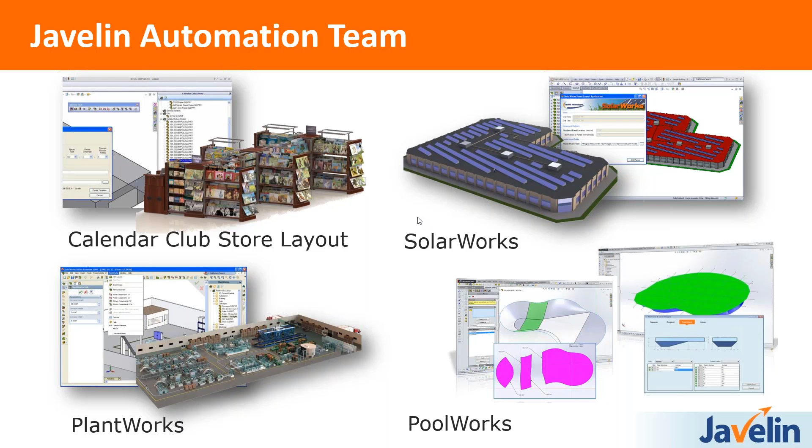Javelin has been selling DriveWorks since 2004, and we have a dedicated team focused on DriveWorks and automation, and Lee is one of our application experts. We've got two other fellows who provide DriveWorks services, training, and support, but we also have capabilities to custom program other applications. Here are four applications we've written based on programming rather than DriveWorks, that automate tasks associated with plant layout, developing pool liners, solar panel layouts, rooftop layouts, as well as planograms for store layouts. So we've got expertise both in DriveWorks and in automation projects, so we've got you covered from all angles.

So last year I started asking people, do you CPQ? And a lot of people told me, what the heck is CPQ? So CPQ is another acronym that we hear fairly commonly. It refers to configure, price, quote.

It's the ability to configure a product based on rules so that you can customize for size, accessories, options, and other features of a product, and integrate with corporate or enterprise systems like ERP and costing systems, so that you can quickly establish the price to manufacture the product, and then quickly generate a quote for that product. CPQ is typically referred to systems not unlike ordering a t-shirt online, or ordering a pizza online, or even buying a car. So the ability to quickly design a variant or create a new variant based on rules, and having the ability to generate the quote within a short amount of time.

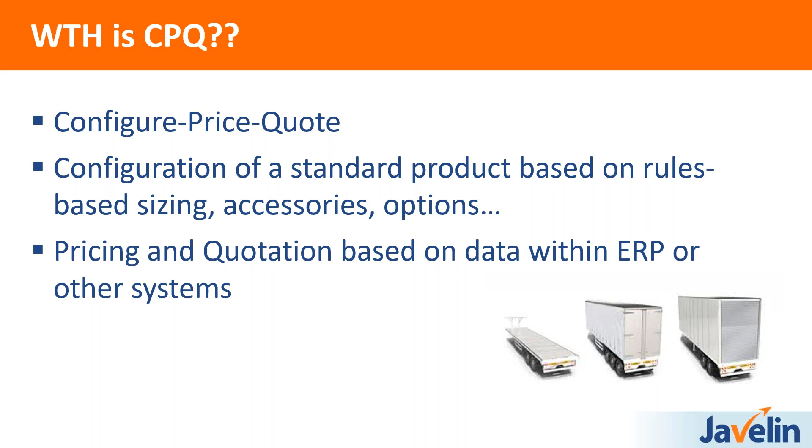Now, one of the things about CPQ, I'm just going to show this for a second. One of the things about CPQ is that it's all meant to be done within a short amount of time, but the one dimension that DriveWorks adds is the ability to generate other documents. So it doesn't stop at the quoting process, it extends a significant way further. So a lot of times I refer to it as CQP, so configure, quote the customer, and then produce all the products based on drawings and other documentation that you create.

So you'll see that in a second, when we start showing some of the presentations.

Now, who needs CPQ? Who needs a package like DriveWorks? If your company is unable to meet quote deadlines... I sold my first license of DriveWorks in 2007, and we've had this team focused on DriveWorks and DriveWorks alone since 2015, so we've been at it almost 3 years. One thing I've learned talking about DriveWorks and talking to customers about configurators and quoting is that the speed of the quote as well as the accuracy is super important. So fast quotes, very important, I hear that all the time.

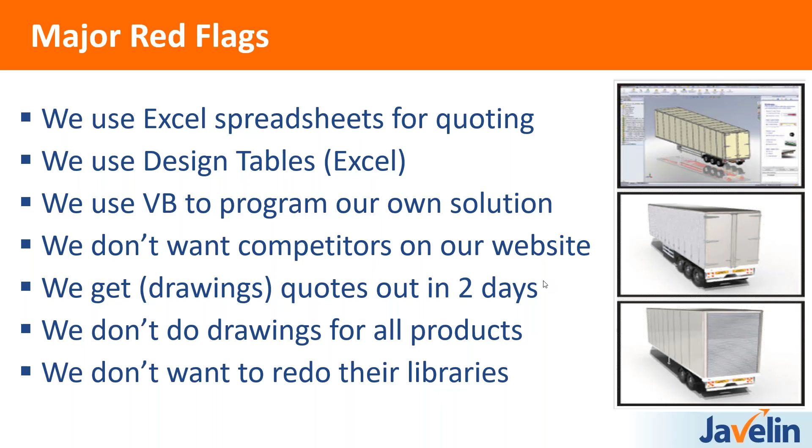So yeah, these are some of the things that, if they are representative of comments that reflect an aspect of your business, then it's probably a good idea that we talk. And I think you're in the right place and are going to see some amazing things.

Real quick customer stories. My first customer is Thordon Bearings. They sell bearing assemblies for large ships, very green, very environmentally friendly. Ships can be found all over the world, and they needed a system that allowed them to support their inside salespeople and their dealers all across the world.

It was quite common that someone had to go out to one of these sites where the boat was located, take measurements, come back. So you got a lot of travel that can be involved, or other projects got in the way. But with this system, people are able to go online, enter the values of each of the parameters for that particular requirement, and they've been able to reduce days of work down to about 6 to 11 minutes.

They produce all their documents all at once, whether it's quotes or drawings or models or NC programming for machining of their parts. We built the system for them, and we integrate DriveWorks with their enterprise systems for CRM, ERP, PDM, and manufacturing. One nice thing about DriveWorks is it's very capable of being connected to other systems, which is very important. In this case, we're connected to a lot of different aspects of their business, automating a lot of tasks.

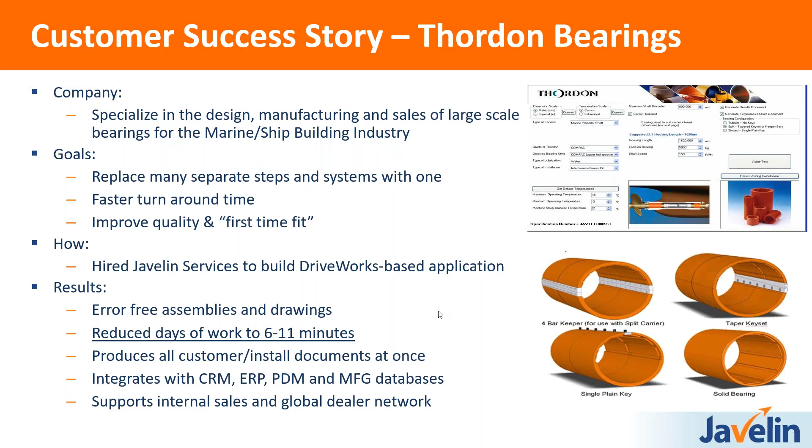One other customer success story I'd like to share is Blue Giant. They've had DriveWorks probably for about 8 or 9 years, and this will give you an idea of some of the dock seals and dock levelers, that equipment that they make. They've got a full-time staff of people that are doing DriveWorks for all of their products.

About 80% of all their projects run through DriveWorks, and of the 20% that do not get completed in DriveWorks, they're started in DriveWorks and then finished off manually for whatever customization is needed. They told us that they were able to reduce the time and effort to create both drawings and quotes by about 90%, and 100% of the drawing errors that they find are as a result of the manual tasks as opposed to what comes out of DriveWorks, as that is all 100% correct. So great customer of ours, and they are thriving with their business with the use of DriveWorks.

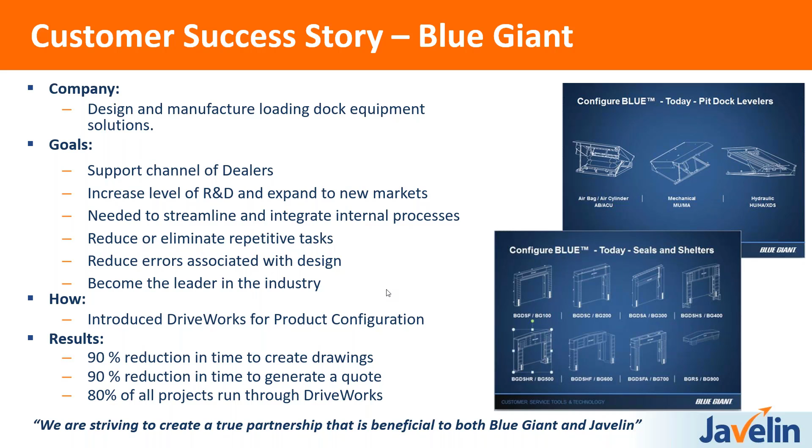So those are two applications. This picture is actually part of a website that shows a lot of different configurators and some of the types of products that you can refer to as same as but slightly different. We'll show you a couple of these applications a little bit later on.

I know a couple of you in here are conveyor folks. I think there's a trailer manufacturer here, and someone doing furniture. So there are some applications, and we're going to show the furniture application a little later on.

Most, if not all of you, are using SolidWorks right now. So as I said before, if you have SolidWorks, you already have some DriveWorks functionality within your SolidWorks license. It's referred to as DriveWorks Express. You can activate it.

It has limited functionality. If you look at the interface here, you'll see there's a panel where you can enter some values, and you have some pull-down lists. It's very static — you can't really connect it to anything for pricing or for generating quotes. It's simply enter parameters and automate models and drawings. So it's good for what it does, and some companies have used it quite extensively.

But we like people to start their automation projects with more capability if they're really serious about it, and it's very important. We recommend the next level of DriveWorks, called DriveWorks Solo.

This version, DriveWorks Solo, also works inside SolidWorks but has much more functionality and controls, like the rules builder, which Lee's going to show in a bit. It's closer to the higher functional levels of DriveWorks, and just that aspect alone will save you the cost of Solo if you're serious about getting into the technology. So let me change over to Lee to give a quick overview of DriveWorks Solo.

Hi everybody. So DriveWorks Solo, like we mentioned, operates inside of SolidWorks. Right here on the side panel is DriveWorks Solo — it's an add-in just like some of the other panels. What it allows you to do, we're first going to run it, and then we'll look quickly at some of the features and how you build it.

The biggest thing DriveWorks Solo gives you over Express as far as looks go is much more functional forms. You're able to have drop-down lists, you can pick from tables, pull in some customer data, and get a little bit smarter about your rules. You can also build form flows which allow people to make different choices, and we have graphics here that help people get an idea of what they're picking.

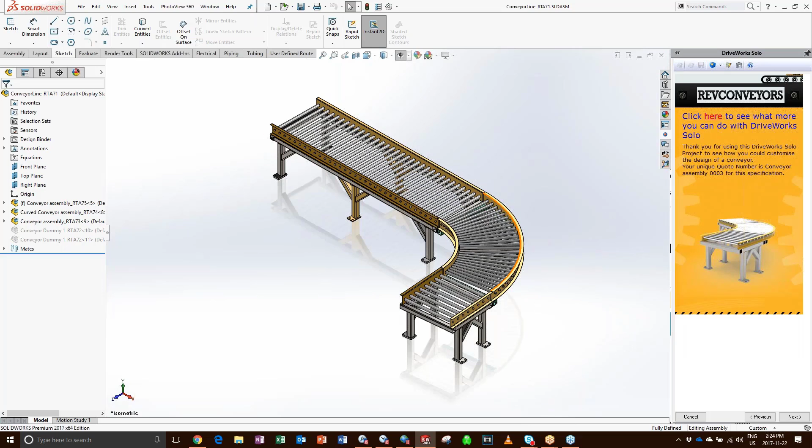If you look at the bottom right-hand side of your screen, you'll see DriveWorks actually opening up SolidWorks, entering the values that Lee just put into those fields, and popping them into SolidWorks. He referred to DriveWorks Express, but this is functionality available in Solo — the ability to put in data and start using it.

So here's my conveyor — I've got it pre-built right there, but now I can go back and, let's say I need the length of the last one to be 2,500. I can enter that in and do preview again, and it will go back and modify those pieces. It's only modifying the models that need to be changed, and in a few moments I'll have an update.

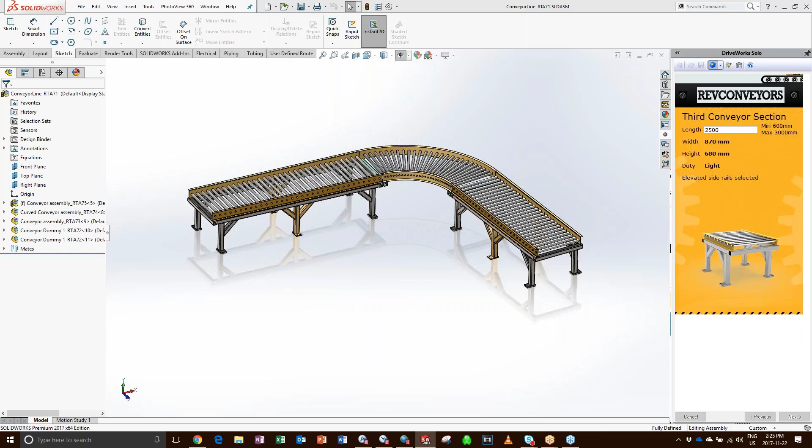So I'm able to actually see what I'm doing, tweak it, modify it, measure it, and all the tools available to me in SolidWorks are available here. So if I wanted to measure the distance between this face and this edge, I'm able to do all of that just as I would with a normal SolidWorks model.

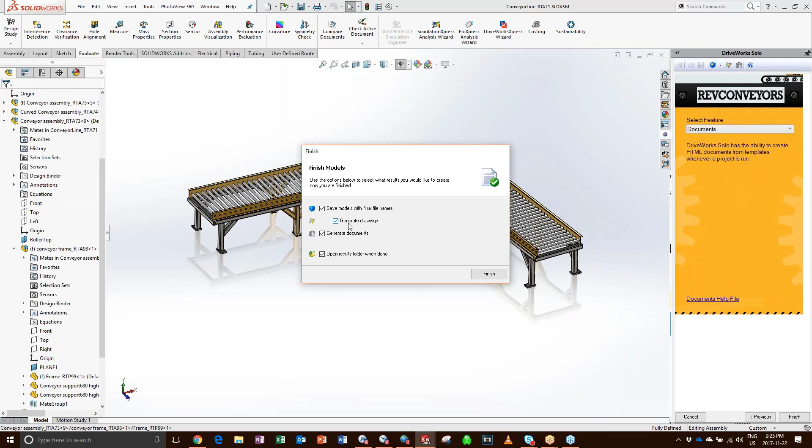Once I'm happy with it, I can then go ahead and finalize, where I'll get the drawings now — we're not just getting models, we're getting the full drawings, and we'll also get some documents for quote and BOM as well.

So we'll go ahead and finalize that. And now it's going to start the drawings here in a second, and you'll start to see the drawings whiz across the screen as they make them one by one.

So these can be really good. These are not just sales drawings. They can be your manufacturing drawings, your laser cutting drawings, your fitting drawings. Anything that you can do in a SolidWorks drawing, you can have DriveWorks produce for you as well.

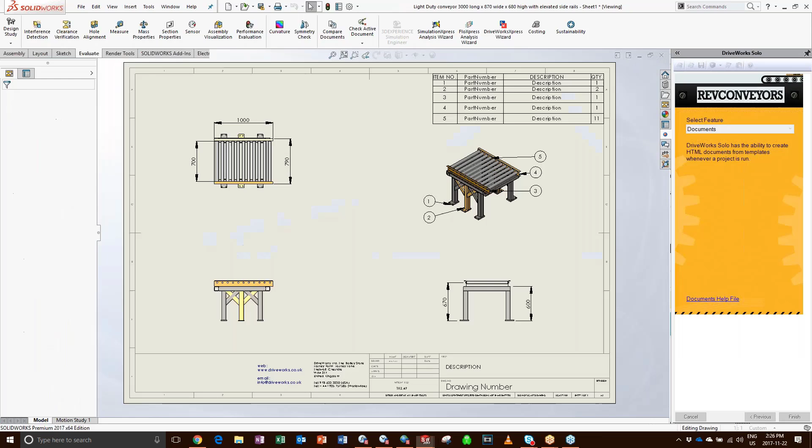So here come the drawings. And you can see it's resizing, it's inserting the new models, it's resizing the views, moving any balloons around that need to be moved, and then creating the drawing files in our new location with our names.

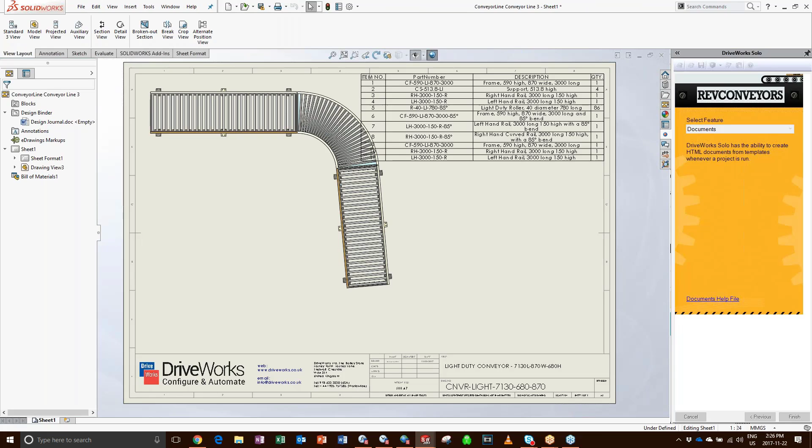And you can see the custom properties are also being filled out as well. So that metadata is going to travel through the different business systems of your company, right? Because once you do a quote and it becomes an order, it goes into PDM, and once it goes into PDM, it goes into the ERP. All of that information can now be driven straight in.

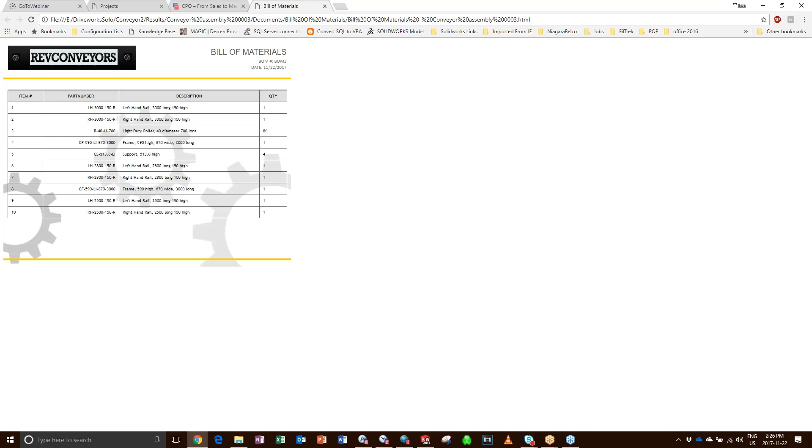You can go and check out our documents. Here's our bill of material, right? And these are customizable to your company. These are HTML documents, so they're really lightweight. That's the only format that's available in Solo, but it's enough to get the job done, right?

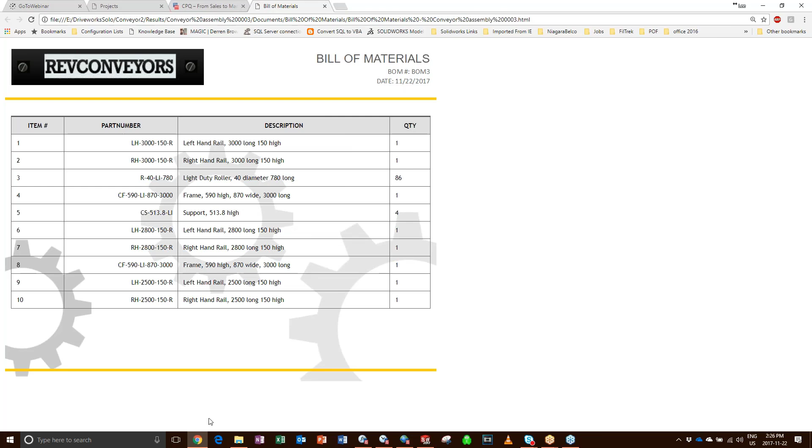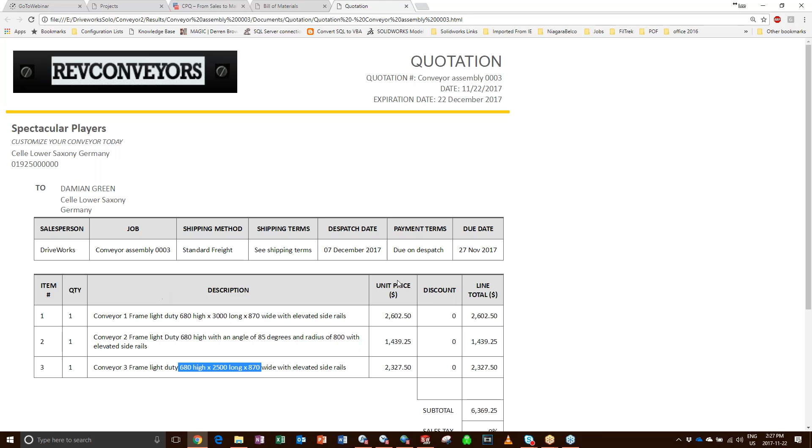We can check out a quotation. All of these rules are built based on what I configured. So you can see there's my 3000 long. There's the one I did that was 2500 millimeters long, right? So all those values get passed in based on rules.

So we've been talking a lot about rules up till now. And what do we mean by rules? This is really, I would say, the most beneficial part of Solo. This is the thing that's worth paying for. And that is having the more advanced rules.

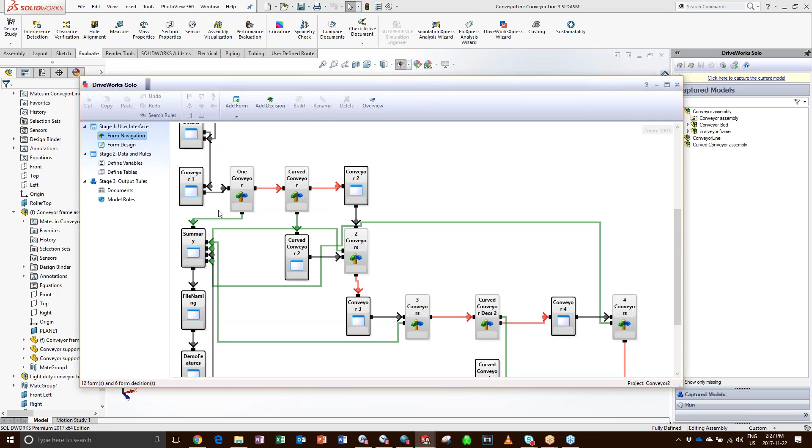Not only can I create more advanced forms and make decisions, so if I pick something, I go to one form; if I pick something else, it takes me to another, so on. I can use my rules to build more advanced forms, like we mentioned. But let's take a look at the hallmark of it, which is the rule builder.

So this is the almighty rule builder. This is the thing that puts it a light year beyond Excel. This is the thing that gives you access to not just building rules. So let's see what rules we can build.

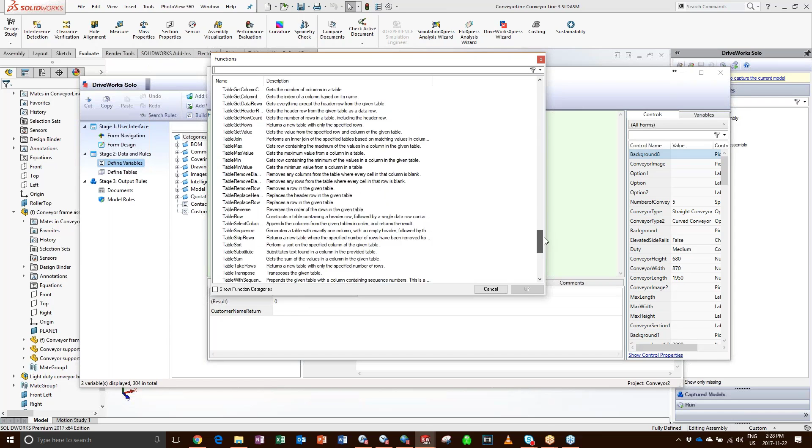We have a whole host of rules in here that we can search through. Pretty much everything that you see in Excel, plus a lot more things that DriveWorks has built custom for us, right? So if we want to look at a VLOOKUP, there's our VLOOKUP.

If we engaged it, the rule builder is actually going to walk us through the steps, and we just have to answer the questions. What are we looking up? What table are we looking in? What column do we want to get back? So on, so on, and so on.

And this isn't just for the VLOOKUPs. This is for every single rule that's in DriveWorks. You're able to have a rule builder to help guide you through it. So you really don't need to know programming to set this up. You just need to know more or less how to answer questions and probably just how to understand formulas like you would see in Excel.

Everything that you see in here is a formula that you could write in Excel for the most part. So the other nice thing too is it gives you some troubleshooting, so we get to break down the steps we're taking. We can also start to drill down through the different rules if we're having trouble. So this is great for troubleshooting your projects, right?

This is very good for troubleshooting projects. It also keeps track of the history and the comments for us in real time as well. So if we make a change and we're playing with something, we're able to go back and actually see what's happening. And if we messed up, we can bring the old one back without any problems, right?

So this is a really great tool. Solo's primary advantage, I think, is the tables. A lot of data we interact with in life is tabular in nature. So, it makes sense that we can bring these tables in, and that's a real benefit for Solo.

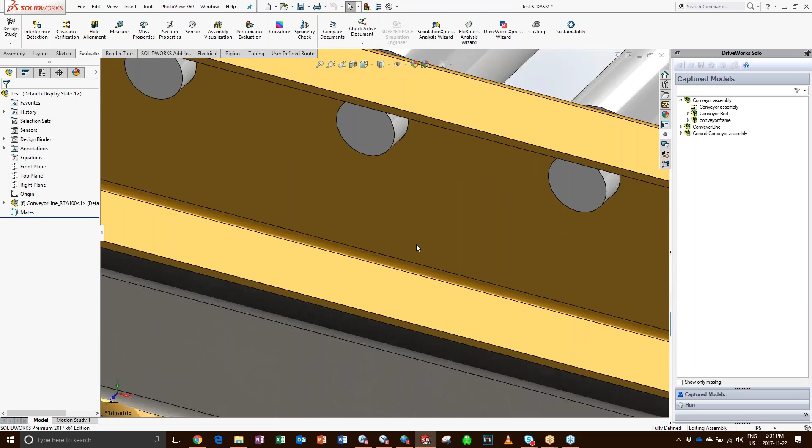So there's one of them, right? And I'm able to go in and grab the top plane here, and I can mate it, right?

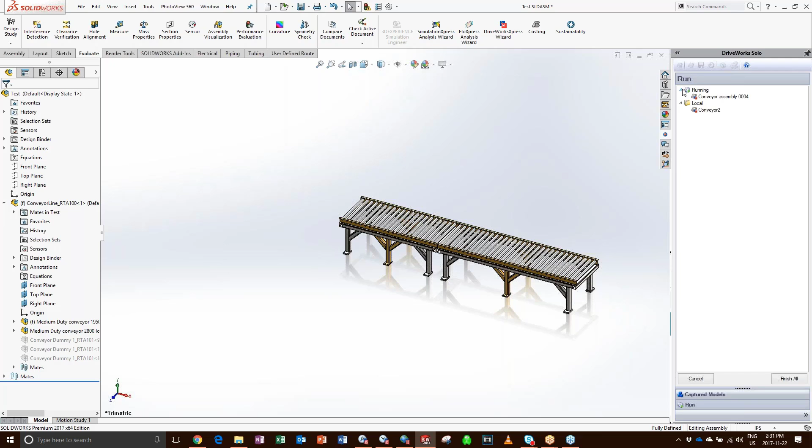Now if I wanted to bring in a second conveyor down here in my run, I can go in and run another conveyor. So maybe this time I want to do one of these bigger ones that's got a curve. I want it to be... well, let's just say I wanted to leave it like that because I don't want to change the width of the conveyor. So I'll do another conveyor.

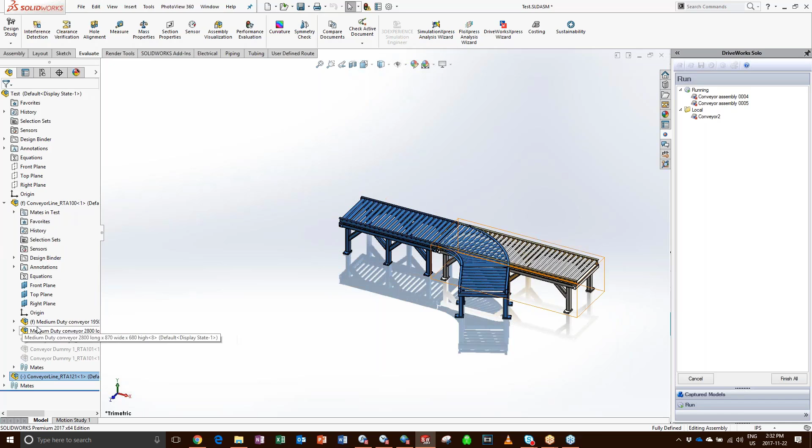And they're all live, right? That's the beautiful part about these. They're all live in here. So if I came in here and I wanted to grab this guy and bring it up and mate it to the back of this guy, just give me a moment here to find my planes.

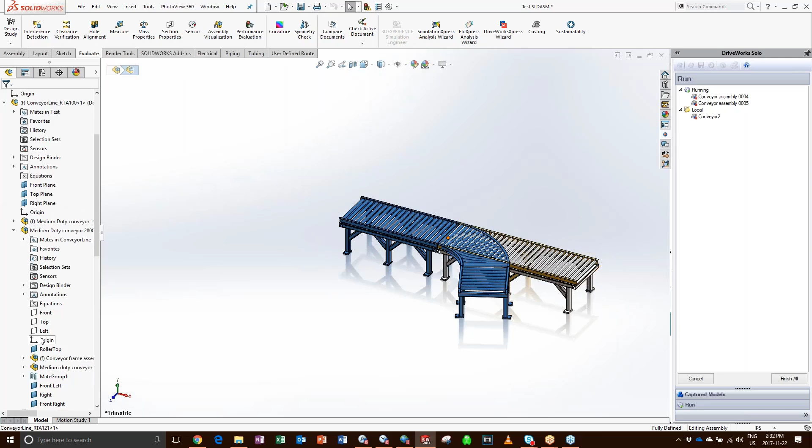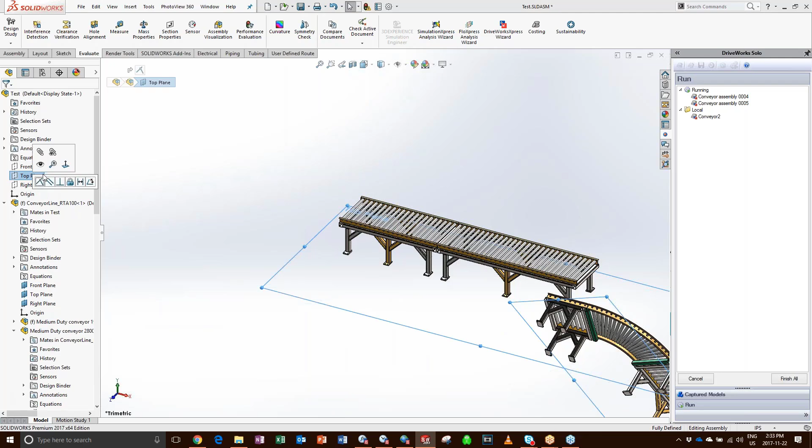Oh, actually, oops. Yep, move here. Okay, so let's take that one. Right, so I'm able to actually start to build an assembly right off of my other planes here.

Okay, now if I wanted to go back, I'll just demonstrate this really quick. If I wanted to go back into this previous conveyor and edit it, let's go back. Let's say I wanted to make this one now 3,000. You'll see that this end conveyor here, this conveyor right here in the middle is going to be updated without actually affecting anything else, which is really neat.

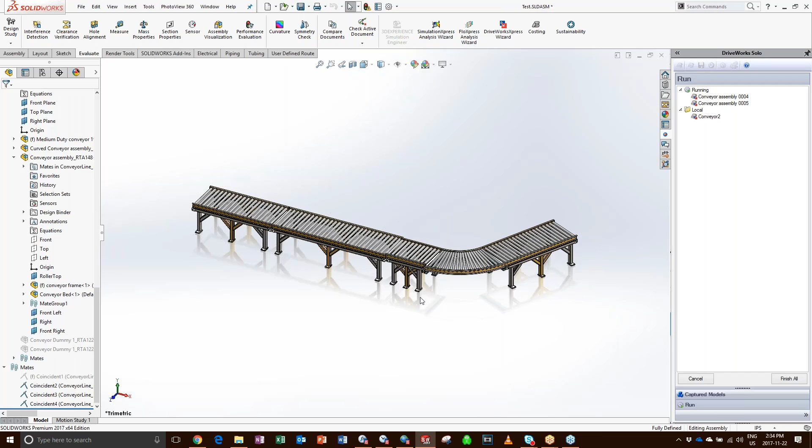So this is a really cool thing. It allows you to build a lot of smaller projects and start to utilize them together to build bigger assemblies. This is one of the ways that if you happen to have a product that you can't actually fully automate, then you can actually start to automate smaller chunks and use them together inside your assemblies in real time.

So that's a kind of a neat thing. Now I think we're ready to go on to Pro. I don't know if John, you wanted to talk about Pro first. Yeah, let me take that.

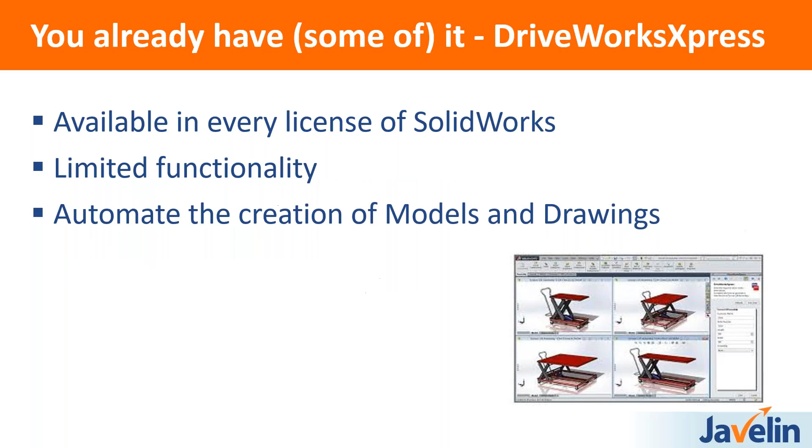Okay, so as we mentioned, DriveWorks is a scalable product. So we started with DriveWorks Express, which is basically just drawings and models. We showed DriveWorks... did I say Express? It's DriveWorks Express. DriveWorks Solo is the next level up that allows you to do components, assemblies, drawings, utilize your lists for pricing or bills of materials or pre-calculations, and the rules builder, which is worth the price of Solo if you get serious about the technology.

We also want to make sure that you knew that there was a 30-day free trial that is supported by Javelin. So if you had a specific project, a small project that you wanted to try DriveWorks out for, we'd gladly help you out, and the application is free for 30 days.

So in terms of DriveWorks Pro, which is the next level up, it gives you much more functionality, much more controls, and a higher level of automation. It also allows you to integrate far easier with enterprise systems like ERP or CRM. So whether you're using SysPro or Microsoft Nav, those types of programs, or Salesforce or NetSuite, we're able to talk to all those solutions. And while he showed DriveWorks Solo working inside of SolidWorks, with DriveWorks Pro, you can get to a point where you can expose your specification interface to non-technical staff.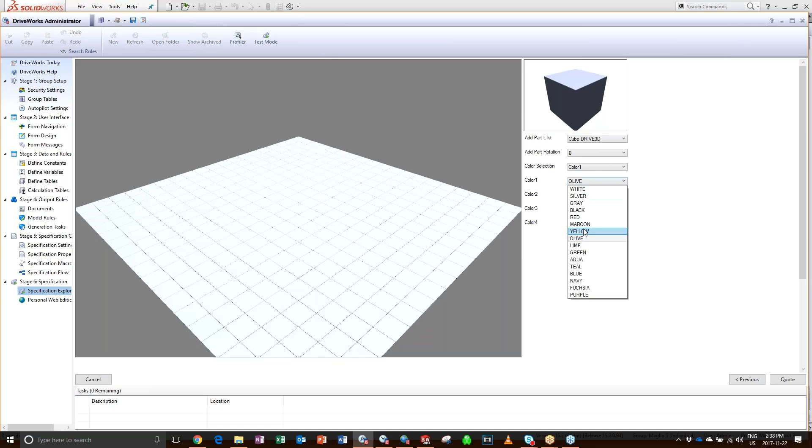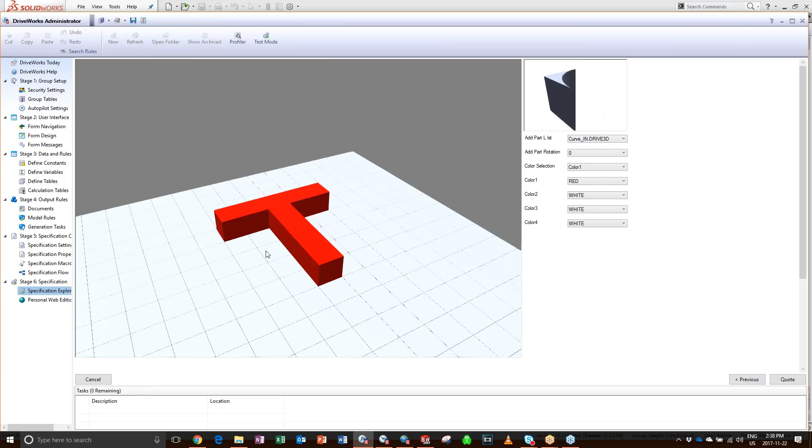This is one we built as an example. The idea is you could do a configuration off to the side and then click somewhere on the grid to place the part. So I'm going to do a cube, using the first color in my list, make it red, and place a few of them on the screen. I can zoom in and out, and go from a cube to, say, a curve, an inner curve, and as I press it, it rotates. Another function here to make this snappy is I just keep pressing on the same part and it will rotate around.

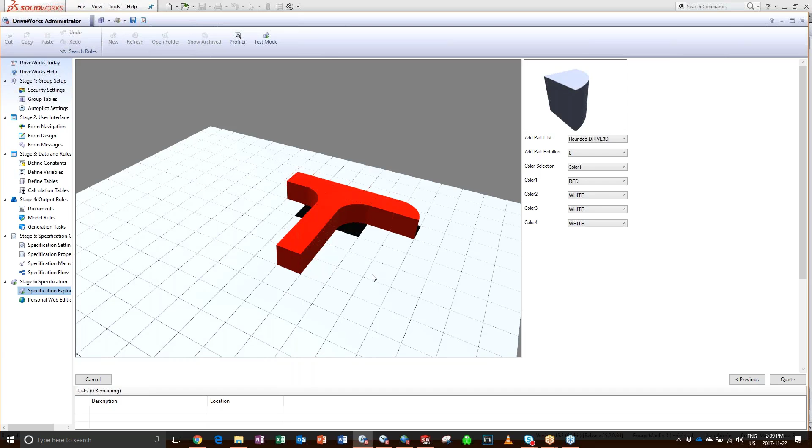This was a nice way to build neat little benches for people. We can do entire layouts outside - this was for an outdoor layout application. It's nice, fast, and pretty quick - you can do it with your fingers on a phone. So we envision this being used - right now I'm doing very simple configurations, but I could be doing much more complex ones if I wanted to.

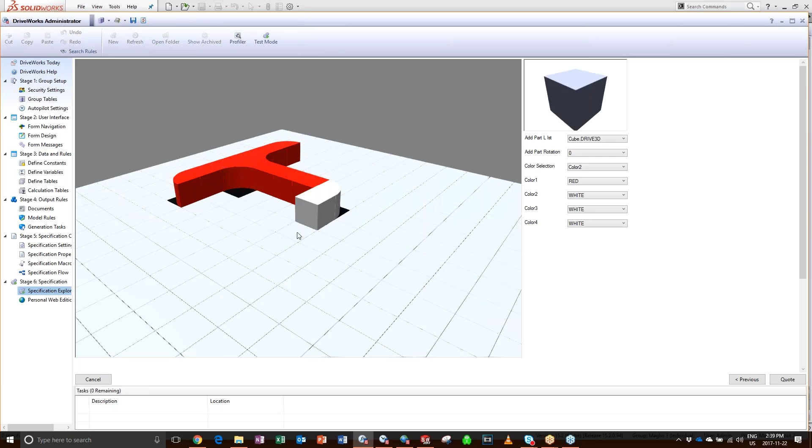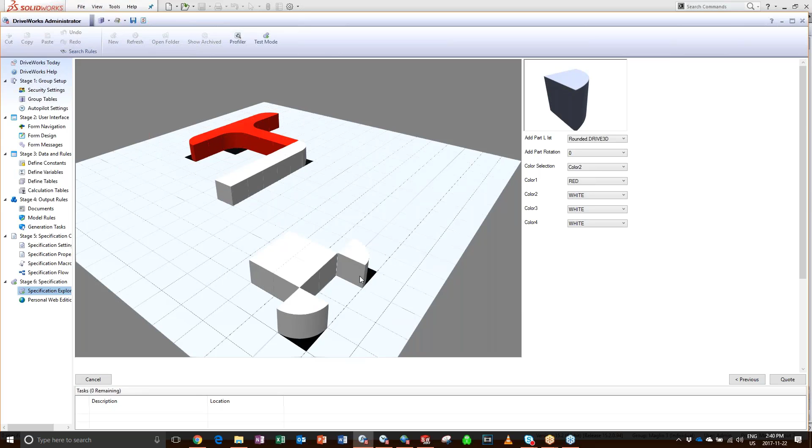We envision you could have sub-projects, or child projects, where you're configuring an entire conveyor, or cranes, buildings, all sorts of layouts. We talk to a lot of companies that do layouts of furniture, conveyors, racking - anything that follows the methodology of picking a product, configuring it, and then locating it. It's tremendous what's happening in furniture - I look at configurators all day and what I see is incredible. We've spoken with companies that do layouts of lab furniture, office furniture - any of those applications could use a system like this.

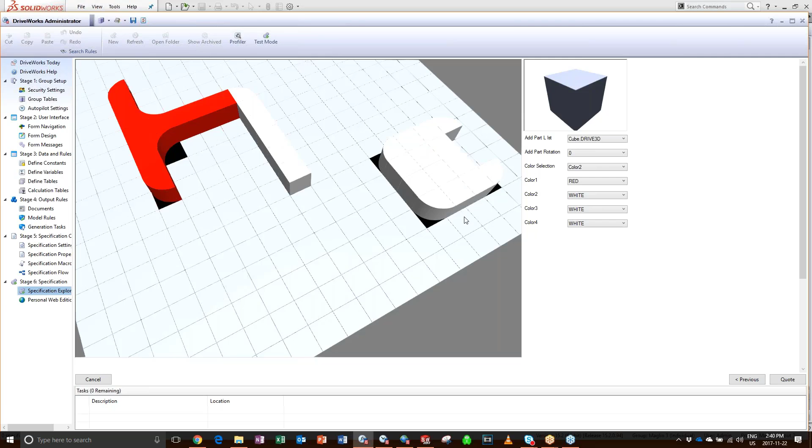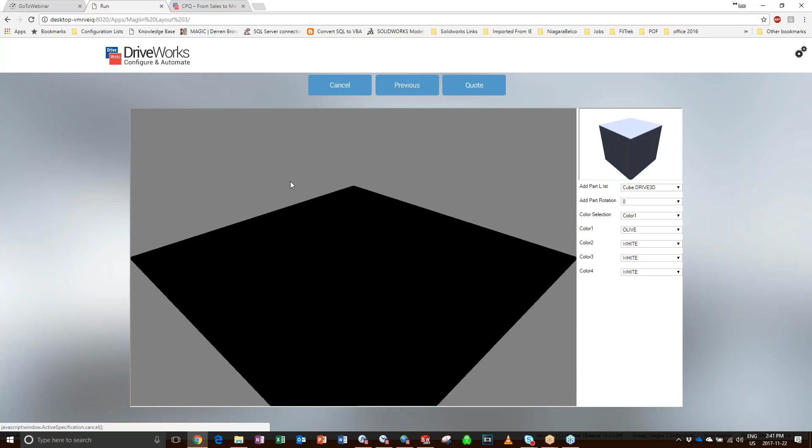Now, this can obviously be enhanced, there are other capabilities to add, but the bottom line is, although it's in DriveWorks, this could be web-facing. This could be a tool someone in inside sales could use with a customer. If you want to see it on the web, this is what it looks like. This was a demo, so we had a first page we were working on for something else, but this is the page here with the same application where we can lay out parts.

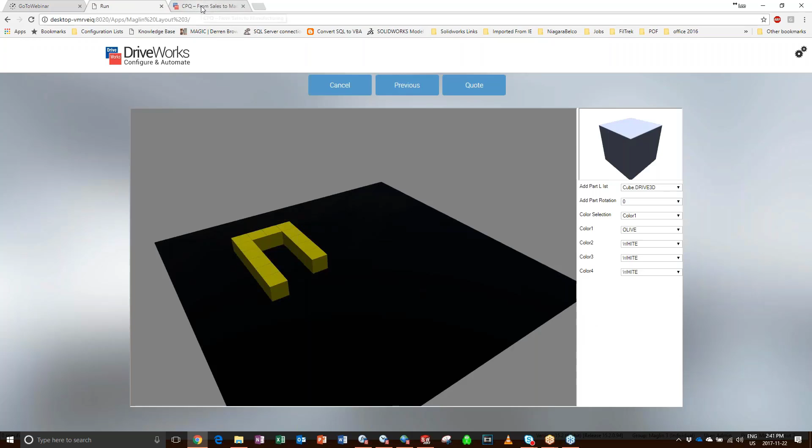Right now the graphics present a little differently - we hadn't built it for live just yet, so the floor is black by default. But you can see it's the same concept - we can spin it, rotate it, right now inside a web browser. This is the exact same technology you'll see in a second based off the website, driveworkslive.com. These are fully functional - everything you saw in Administrator and in the live personal website DriveWorks gives you can also be embedded in your real-life website. There's full flexibility in how you want to use the program.

You can use it in-house, just as Administrator, or you can use it in a private internal-facing web deployment, external web deployments, or embedded into your existing public-facing websites. It's very flexible.

Can I take that back now? Yeah, okay, great. Yep, thanks a lot, Lee. I appreciate that.

Lee is absolutely right - not every company has to go to the web or have the full graphics. These configurators, like if you've ordered a pizza online, can use images or just text to guide you through the process. Some companies just need something for engineering to get drawings out fast. It really depends on what you need to establish what level of functionality is required. As Lee mentioned, these are web-based, but they could also be set up to run right inside SolidWorks, so you've got full flexibility and control over where you want to go with this.

I'm going to click through this cupboard example because it shows a lot of different concepts of DriveWorks and CPQ - Configure Price Quote. These are publicly available websites, so take down the link or ask me for them and I'll give them to you, and you can start playing with them to see all the capabilities.

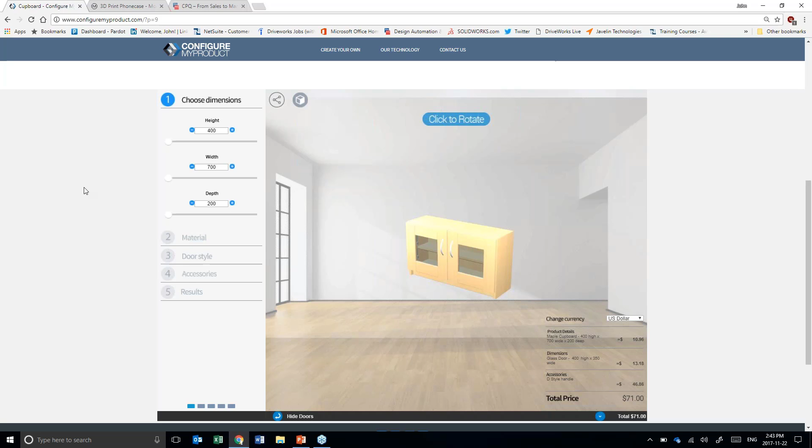I like to show this one in particular because it shows a lot of different things. You can click the rotate button and spin it around, zoom in, zoom out, or take the doors off to have a closer look. It's very graphical - as Lee mentioned, we've got furniture companies that need this because they sell a graphical product. They want to show off the way it looks and give people an idea of what they're going to get.

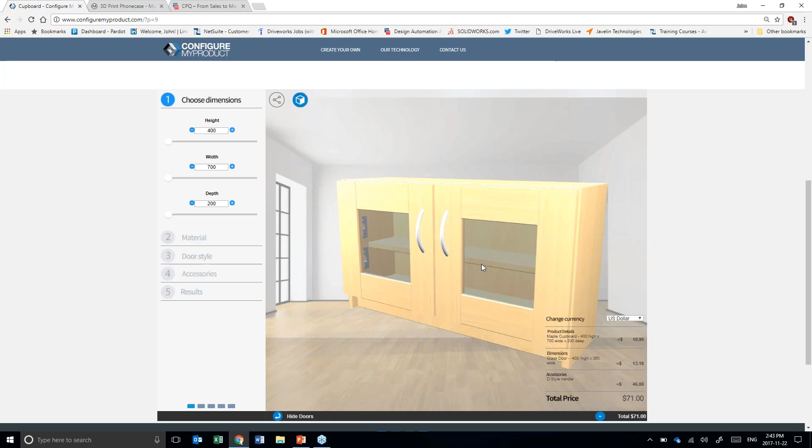The other aspect of this website is the interface is set up to show the cost. Right now, you can hit this button to eliminate the detail, or you can just have it set up so it doesn't show the cost at all. It's totally up to you.

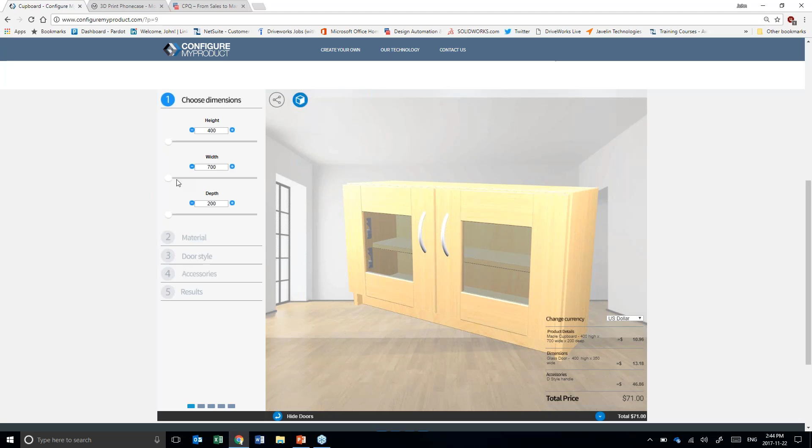There's multiple different ways you can change how this cupboard looks. With DriveWorks Pro or Solo, you can have pull-down lists - so if you had every height from 3 feet to 4 feet in 1 inch increments, you could pick from a list. Or what I like to show people is I can simply click on this button and slide it all the way to the right. Two things happen: it changes its width and it updates the price.

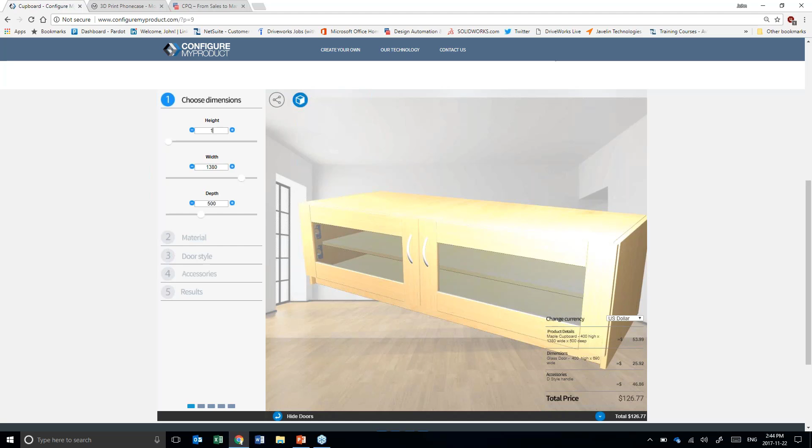Although you can pick from lists, there's a number of different ways - you can just add a value. Let's go to 500 on the depth. Very responsive, highly graphical, very visual, and it's also controlled by rules. So if I pick 10,000, it will not let me go to 10,000 - it'll stop at the default. There are other ways to handle that too: you can show the upper and lower limits, you can have flashing lights. There's a number of different ways you can manage that type of situation.

The point is you can. So if you're concerned about people specifying something that you cannot make, DriveWorks has the ability to insert rules that allows you to specify only what you can make.

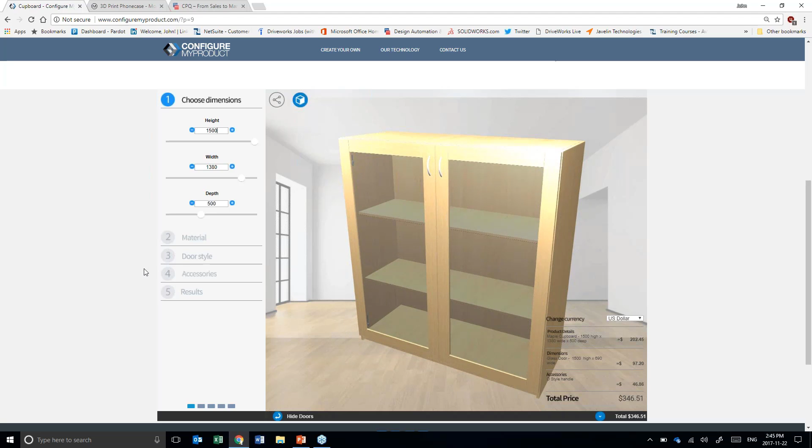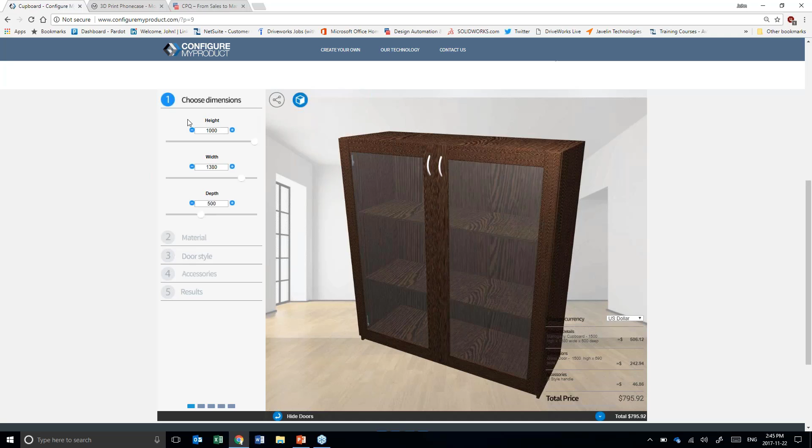I'm going to just keep making changes - if you've noticed, the price has changed. Look what happens when I click on mahogany - it goes from $346 to $795. So if you're on a budget, maybe you wanted mahogany for sure but you'll take something a little smaller - that'll cut down the price a couple hundred dollars. So you see how flexible the system is. You can keep on making changes.

Let's put a solid shaker door there. Let's change the handles to have a shaker knob. Let me go back - I like that glass one there. So you can keep changing as much as you like.

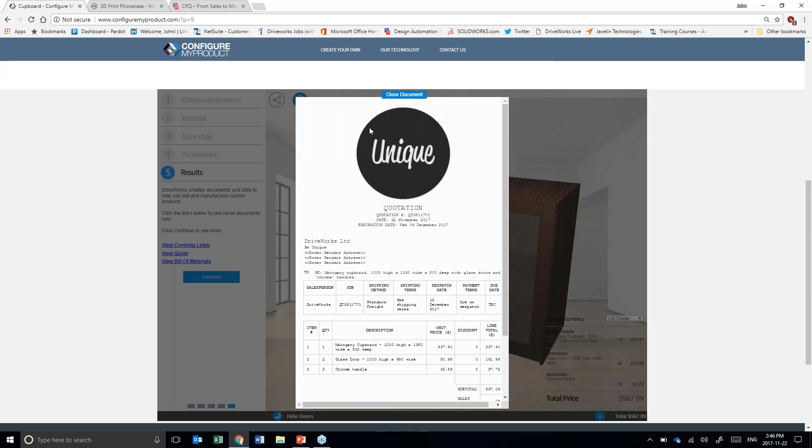One thing you'll notice if you play with this website, which I highly recommend, is that the quote has already been generated. As you've been making your selections, DriveWorks has been building the list of parts that go into the quote and the detail of the quote, and it's generated for you. So when we talk about fast quotes, I like to refer to these as instant quotes - not a lot of effort, you just click a button and they're there for you. Same with the bill of materials.

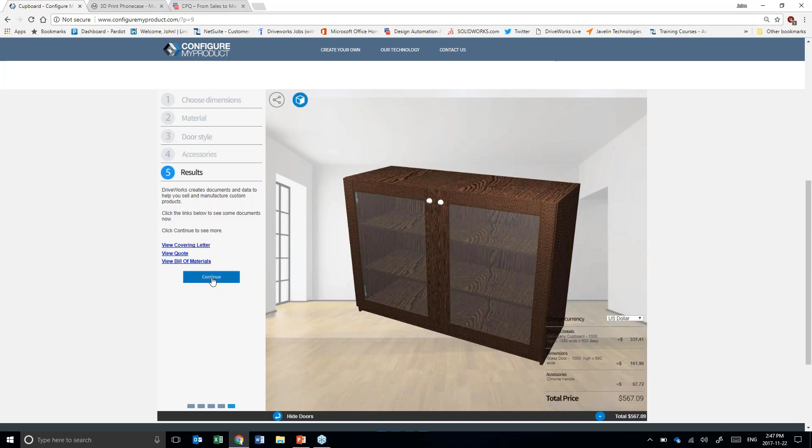Right out of SolidWorks, it takes all the components that you've put into that document and gets generated instantly and automatically. The other nice thing about this website is if you wanted to see the outputs, it's set up to generate all these documents, like parts and assembly drawings in PDF, cover letter, BOM, and quotation. We saw those already. Also DXF panels, so if you had sheet metal parts, we'd flatten them and give you the flat panels, and also the cut lists.

So let me type in his name at javelintech.com, and I'll type in Javelin here. So I'm going to hit the send button at 2:47.

Lee, if you could let us know when you get these. What's going to happen immediately is you'll see the interface changes, and all these documents will be created automatically by DriveWorks, the autopilot license with an attached license of SolidWorks. It's going to be generated by the DriveWorks server. This one in particular is located in the UK, but you can host them locally, or on Amazon if you like. As you can see, all these images have already been created and are now being presented to you.

And if he hasn't already got them, Lee will start getting the quote, the BOM. Yeah, I just got it. Okay, I just got them. Yep, took about a minute. So all these drawings are heading over to his email inbox as well.

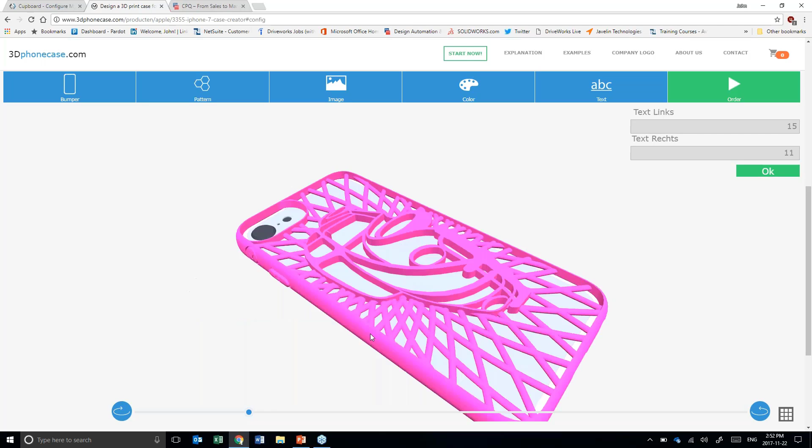It's not working the way I want. Okay, bottom line is, once you've made some changes to this... oh, there it is. So it's made the updates. You see that it just took a little while there. I could go in and change the color.

Let's make that yellow. There you go. Pretty quick, pretty responsive. Let's make another change. Let's add some text on there. Oops.

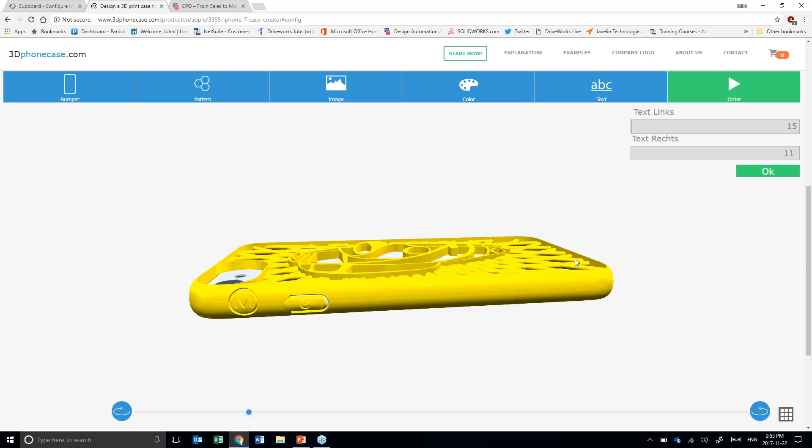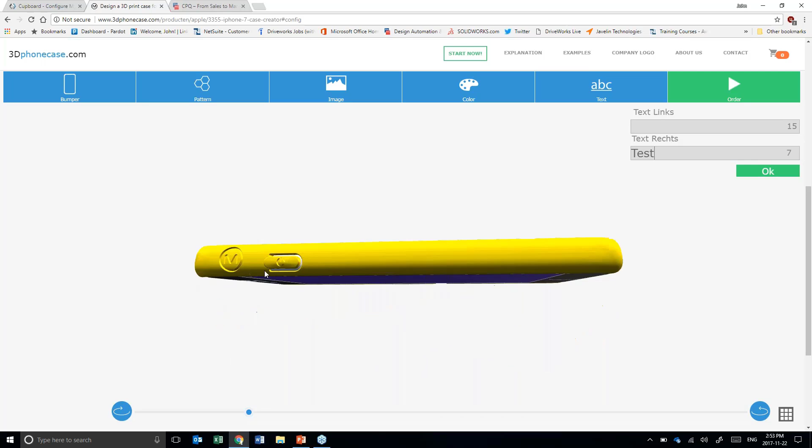Might take a little while. Hasn't come up yet. Okay, there you go. I think that other one was a little too long. So there's a

customization. Now the one thing about this, it's a live business, so I can hit this button and place an order for it. So this demonstrates how you can create a shopping cart type of situation to support e-commerce.

And the other beautiful thing is that with this company, they'll send that file that was just created, that 3D model in an STL format, to a 3D printer, print it on the 3D printer, put it in a box, and mail it to your door. So this company is in the Netherlands, but I like this website because it shows how we've merged technologies such as configurators and 3D printers.

We're looking forward to the metal printers as well, so that if someone's making small gears or those types of components, you can merge the two technologies. So pretty interesting. Here's another one that I wanted

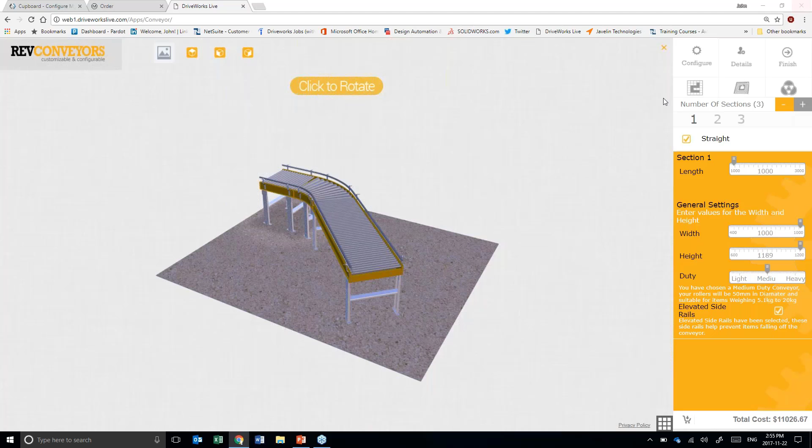to show. So you saw the conveyor example in DriveWorks Solo, and now I'm going to show it in DriveWorks Pro. We're kind of running out of time, so I'll go real fast. So here's an application where you're doing this conveyor on the internet. I can click that button to rotate, just like I did on the other site.

I can start adding sections. So let's see if I can add a section here. It'll do it live and in real time. I'll set that up as a straight section so that the angle goes away, and now I can enter a value for straight, so I have the overall length.

Let's say I want to change some of the accessories, and let's say I want to take the side rails off. Now, this site as well shows the cost, so if you can see the cost down here, if I take these side rails off by clicking that button, it drops the price from $15,782 to $15,382. So you're getting the idea that you're connecting quoting to design.

This type of interface could be put in the hands of someone in inside sales or in engineering. Some companies are putting this into the hands of their dealers, qualified, trained dealers.

Most of our customers will give their dealers a login and a password, so the system knows who they are. They keep track of all the quotes they're presenting or generating. They know what their discount rates are, their shipping rates, their exchange rates. So you can build a lot of intelligence into the system and really amp up your business, especially if you deal with or work with a lot of dealers. And so it has enabled our customers to do that quite effectively.

So those are 3 websites. It's getting close to 3 o'clock, so let me just... do you want to add anything to that, Lee? Before I...

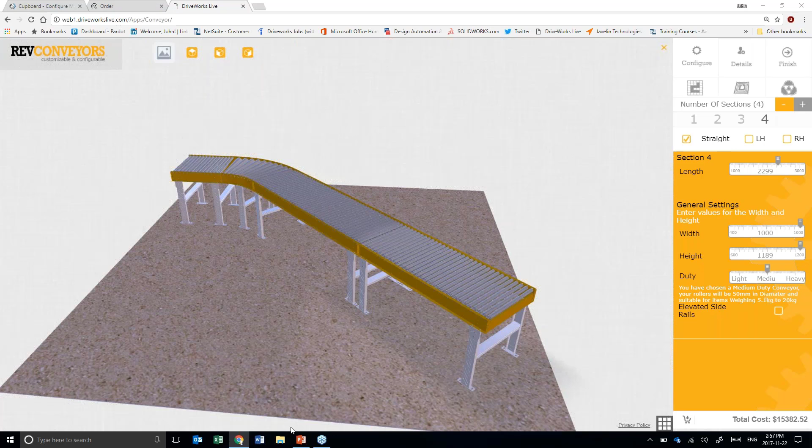So yeah, let's do some wrap-up slides. We showed DriveWorks Express inside of SolidWorks. DriveWorks Solo is the first paid version, and it works inside of SolidWorks as well. DriveWorks Pro can work inside of SolidWorks, but it does enable you to go to the web if you want to get to that level of functionality and capability.

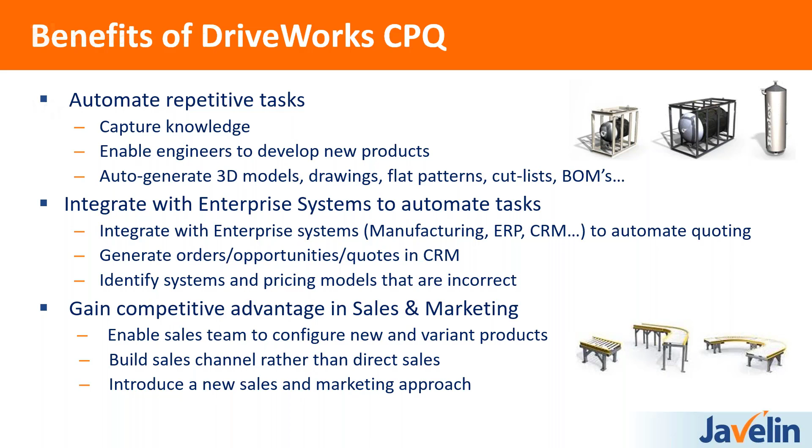In talking to people on a day-to-day basis, I connect with as many sales and marketing people as I do with engineering people. Sales and marketing people are always looking to grow business, increase sales, get people to their website, and have a unique competitive advantage, so this type of technology is of high interest for those folks.

In terms of the next big thing, we're working with companies—we have a partner company to Javelin that's involved in virtual reality and augmented reality. We've seen a real increase in applications where you can put that desk inside your room. One of our customers built an application where instead of taking a huge piece of equipment to a trade show and spending tens of thousands of dollars, they developed a model and used augmented reality to look at all the features of the machine as if it was there.

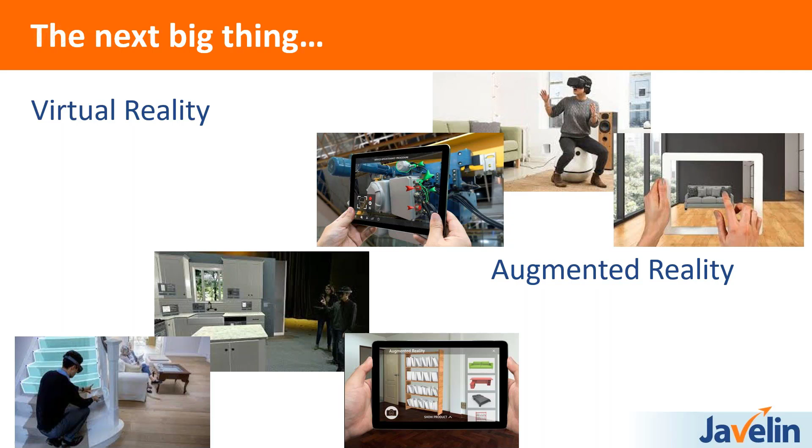These are the things we're looking at with DriveWorks to support these types of applications. As I mentioned before, a lot of times the engineering manager is the last person in a company I'll speak with, because people in sales, marketing, operations, IT managers, and business owners who want to grow are looking for ways to streamline operations and sell to more people effectively. So we appreciate any referrals you have of people in your organization who do these types of jobs.